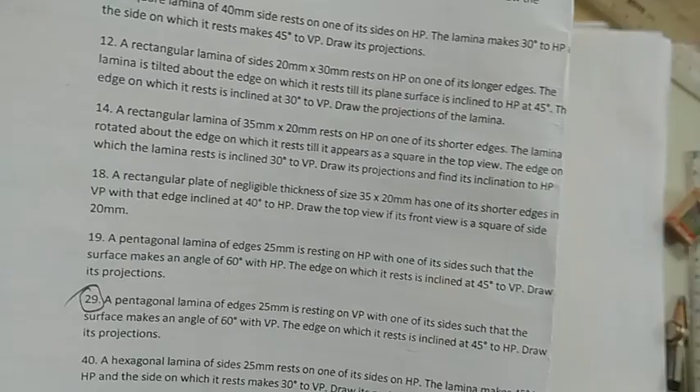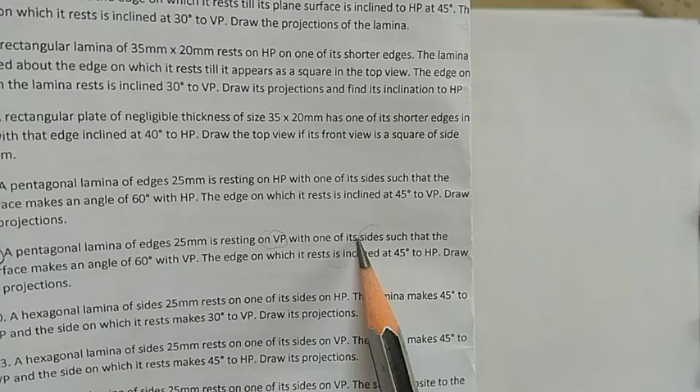So, friends, here we go with number 29. A pentagonal lamina of edges 25 mm is resting on VP. So, it rests on the VP on one of its sides, such that the surface makes an angle of 60 degrees with the VP and the edge on which it rests makes an angle of 45 degrees with the HP.

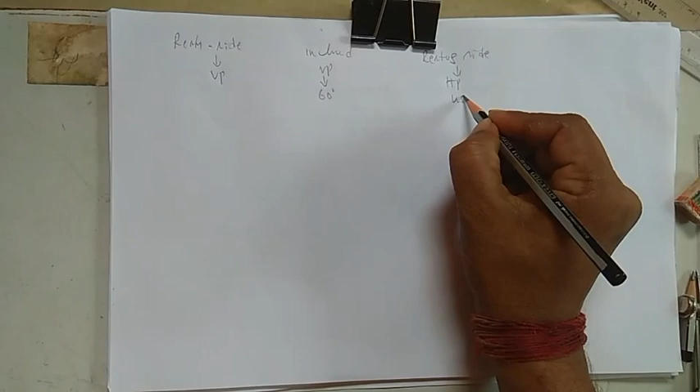Okay, so here what I have to note down is: it rests on a side on the VP, important. Next, it is inclined to the VP at 60 degrees. Next, the resting side is inclined to the HP at 45 degrees. So if it is resting on the VP, for the second position you look for the word inclined to the VP, and for the third position you look for the word connected with the HP.

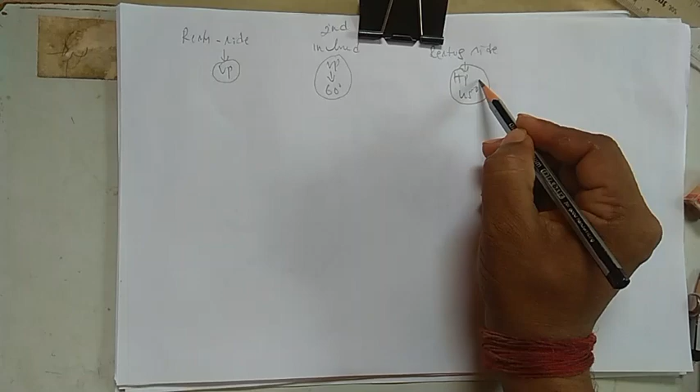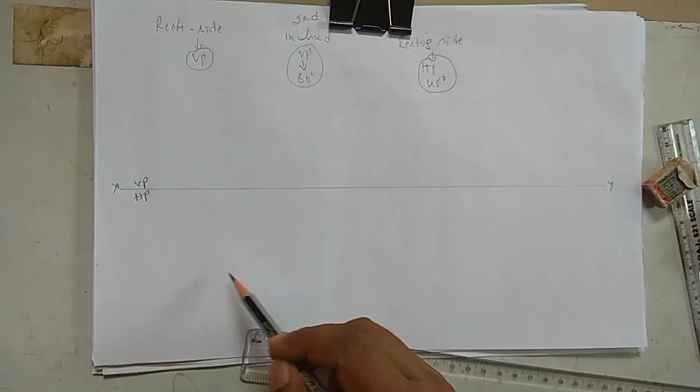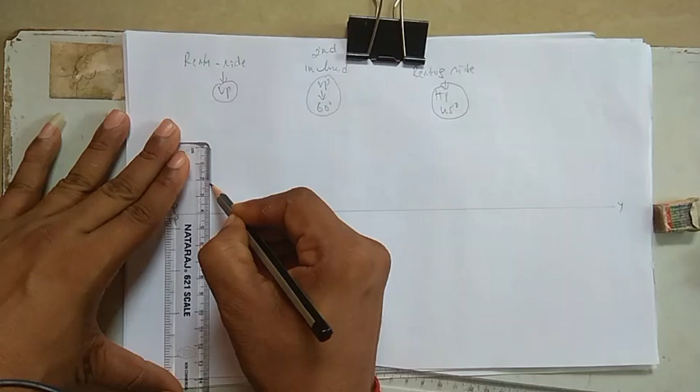Okay, so to start with, we'll take a reference line and write: this is the VP, this is the HP. Resting on VP means it should start above the XY line. If it is resting on the HP, you have to start below the XY line. Now the side is 25 mm, and it is resting on the side, so the side has to lie to your left. Okay, it's 25 mm.

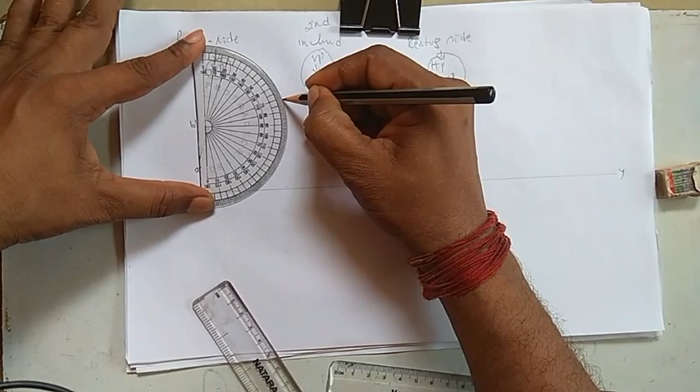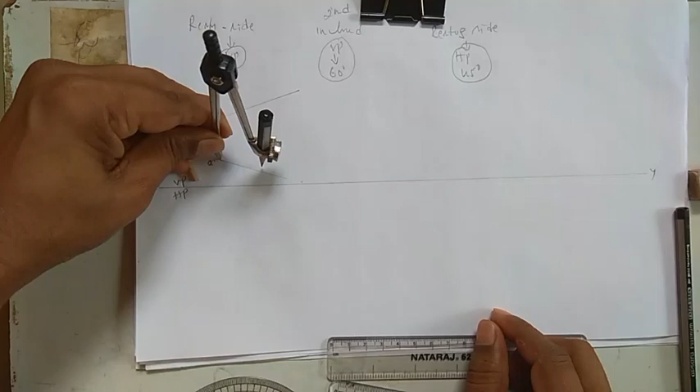Okay, so how to construct a pentagon? This is A dash and this is B dash. Keep a protractor at side A and mark 72 degrees, and keep it at side B and mark 72 degrees from there. Now take a scale and draw thin lines, and with the compass take the same 25 mm, cut it on this 72 degree line and on this 72 degree line, and again from here cut the same length with one more arc. Now join these lines with thick lines.

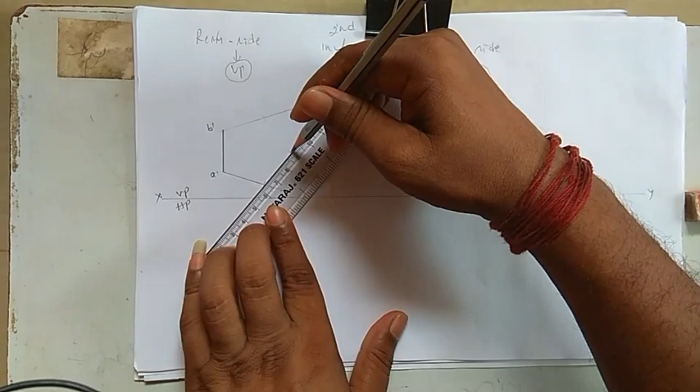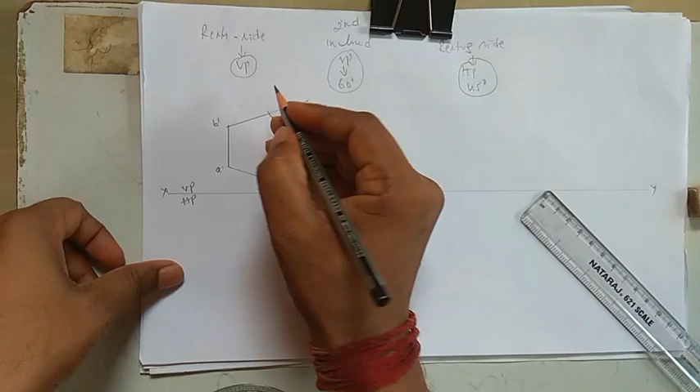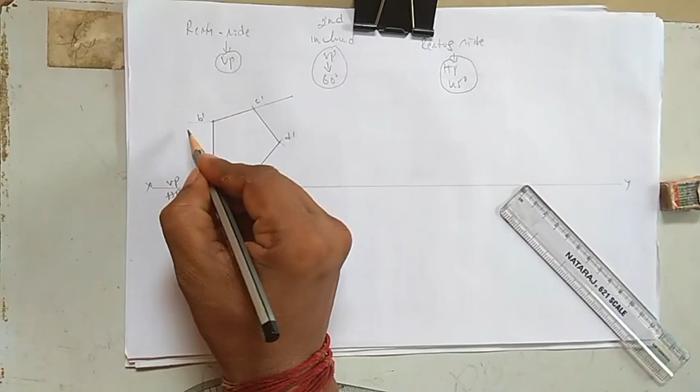Okay, so this is exactly how you can construct a pentagon. This is my C dash, D dash and E dash. So once again, we took a side length of 25 mm. You can draw a line here also. So this is 25, and we took 72 degrees from side A and from the opposite side B, and we took a 25 mm length and cut an arc.

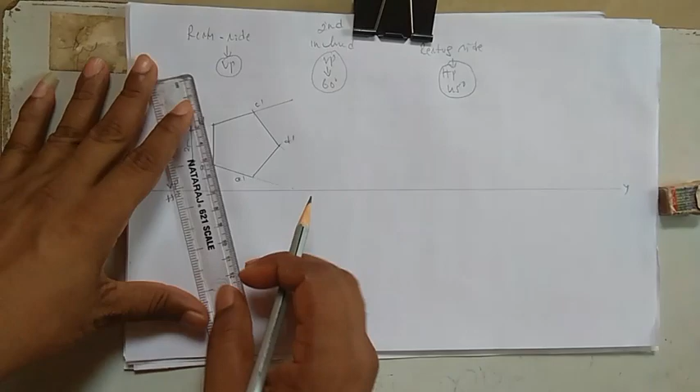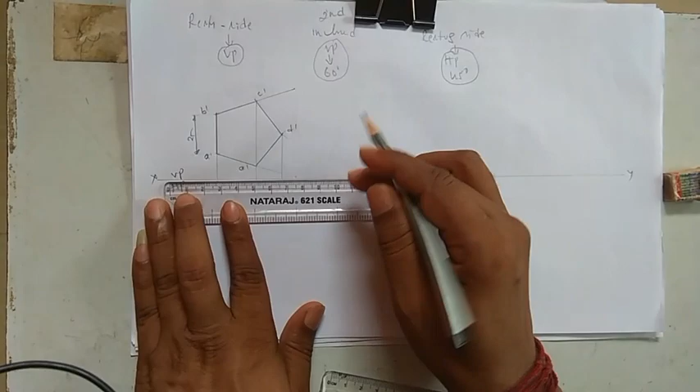So now take a projection downward. These two have to pass through the same line. Okay, so this much should be dark. We'll write: B is near, so B with A in brackets, C is near, so C with E in brackets, and this is D. Till here it should be.

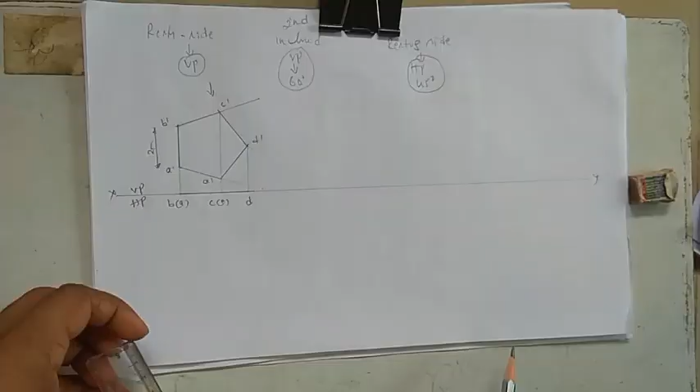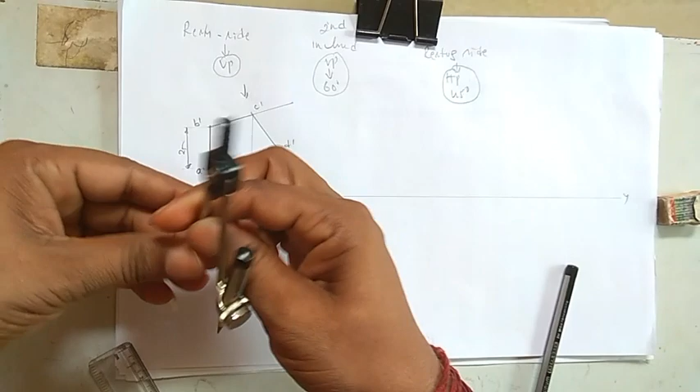Okay, so once we get this view, now it is inclined at 60 degrees to the VP. So take any one reference point. It's 60 degrees. Draw a thin line again on this one. Now take this length from A, B to D, and from this reference point cut an arc. So this is our B with A in brackets and this is our D.

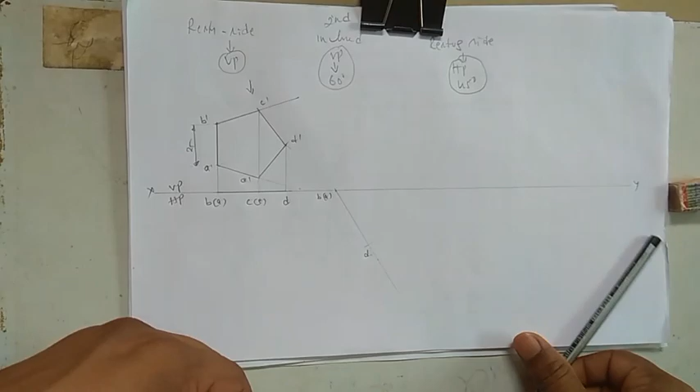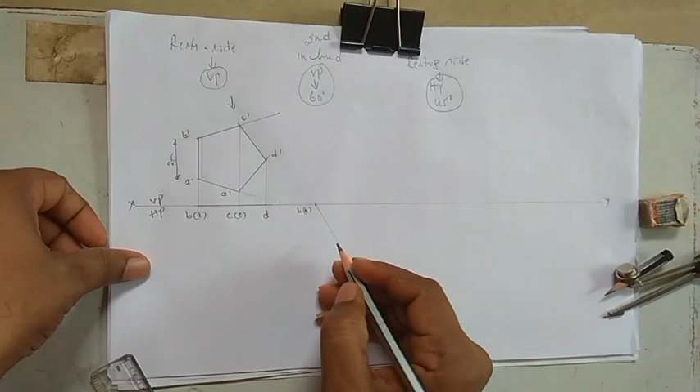Now from D take the length CD from this reference and cut it on this line. So this is our C with E in brackets. Okay, so make this much dark.

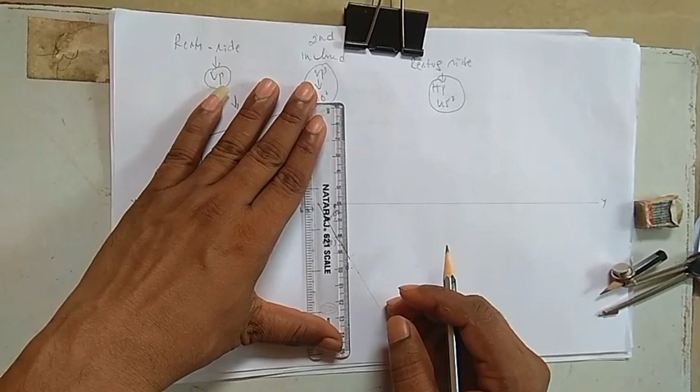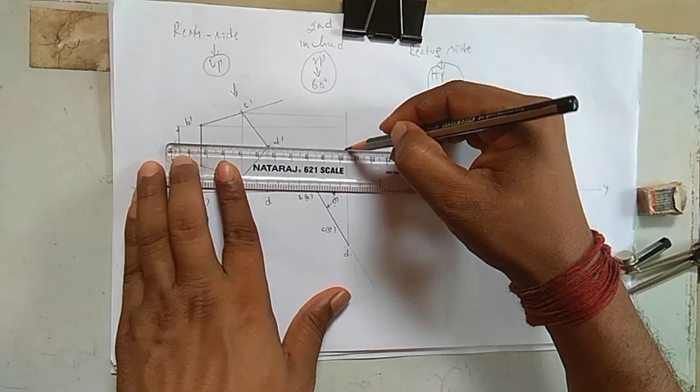Okay, so while writing, the angle should be close like this, and 60 should be written like this. This is 60 degree. Okay, so while projecting, what you can do is first drop the right extreme line. Okay, right extreme line, then here the topmost one. Okay, complete that one. So now either you can choose to draw the horizontal line till here, or you can draw the vertical line, whichever you feel, you just drop it.

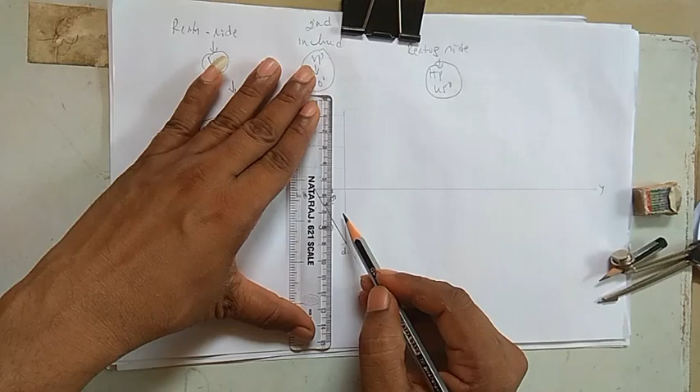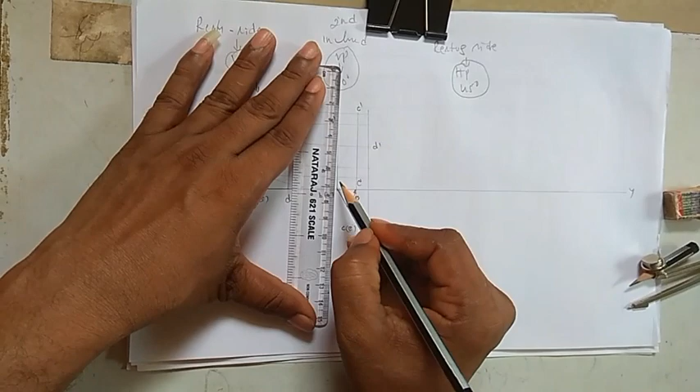Okay, so like this. Now while drawing this one, this is CE, you just see here E and here it's a C, so you just drop this line till the top, and you can say this is C dash and this is E dash. On this line this is D dash. Okay, now this is A and B, just drop till here, so this is B dash and this is A dash. Okay, now join this one with a dark line.

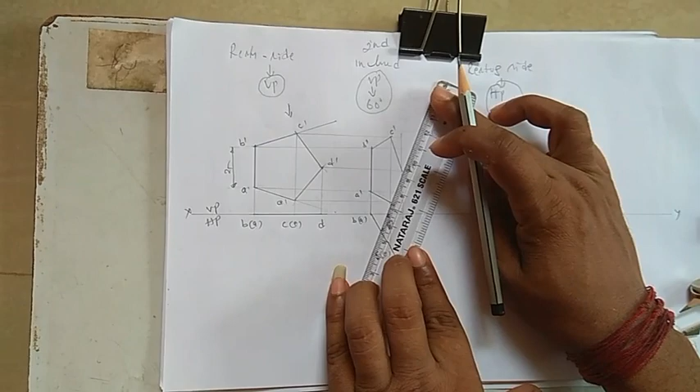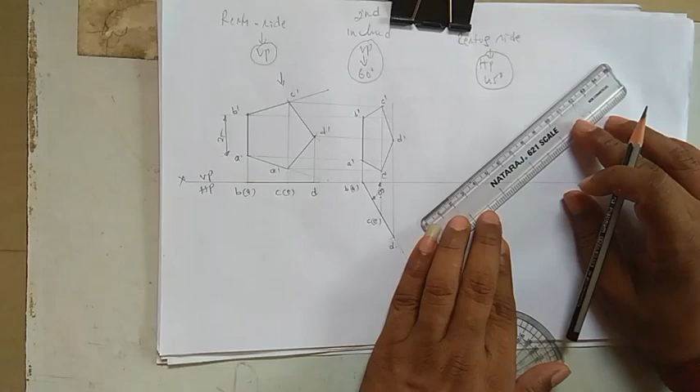Okay, so this is how exactly it is visible, only this much should be dark. Okay, so now it is the resting edge. This AB is inclined at 45 degree. So now take any reference point here. Okay, so 45 degree and just drop a line on that one. Okay, so this is 45 degree. Okay, so now you have to construct this pentagon on this one, keeping this AB or this line.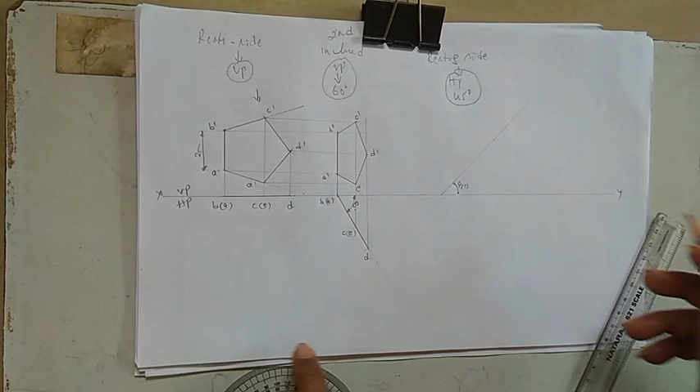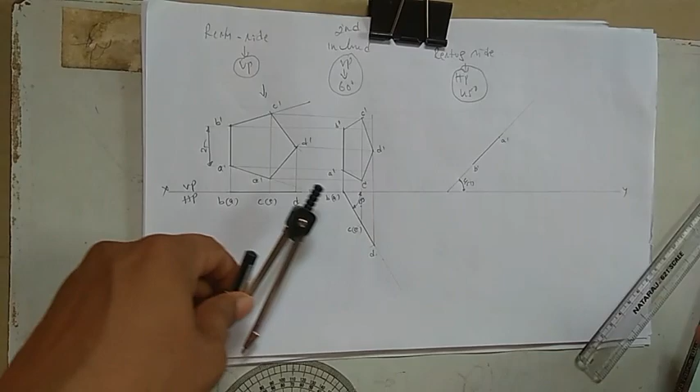Okay, so now anyhow AB is 25 mm, just take 25 mm directly from any one reference point, so here, so we'll take and we'll place it like this. So B dash will come here and A dash will come here, so this and this point. Okay, now you can go with the arc method, or the easiest one is: D lies at the midpoint of this one. Okay, so now you can say this is 25, half of this one is 12 and a half. Okay, 12 and a half, and drop one perpendicular line, just one perpendicular line.

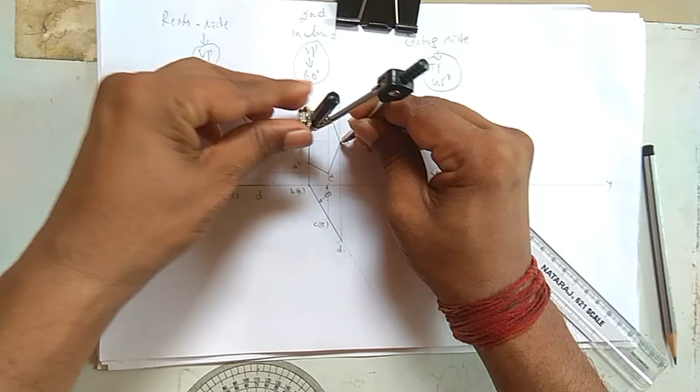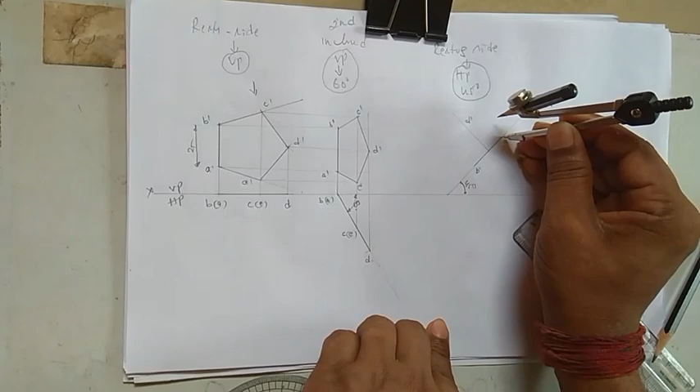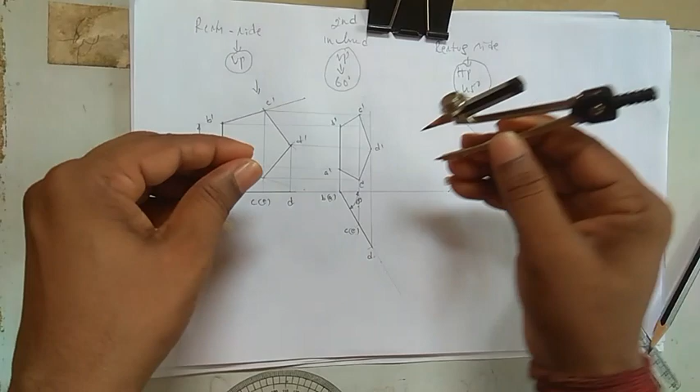Okay, so now take this length D and this length, from here cut an arc. So this is our D dash. Okay, now we have A, B, D. Take a reference from A and D. Okay, from A to C you just cut an arc, and from D to C. Okay, so from D cut the arc. Okay, you can check it out from D to C again. Okay, so from D to C. Okay, so from B to C, from B to C.

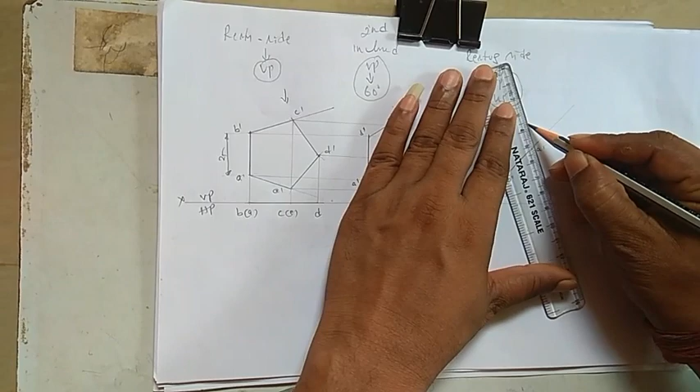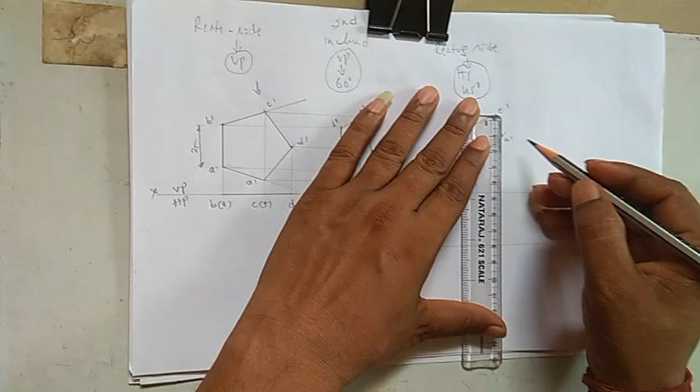Okay, so now join here, here, here, and here. So A, B, C and E dash. Okay, so now project this one down. First, what I said, you just take one bottommost line like this and one rightmost one. Okay, so project these horizontal lines because there are only three.

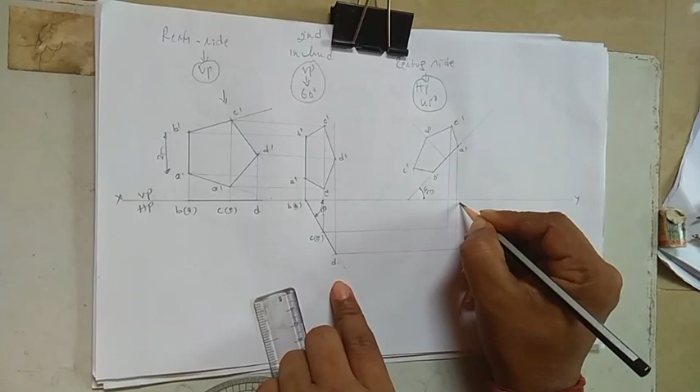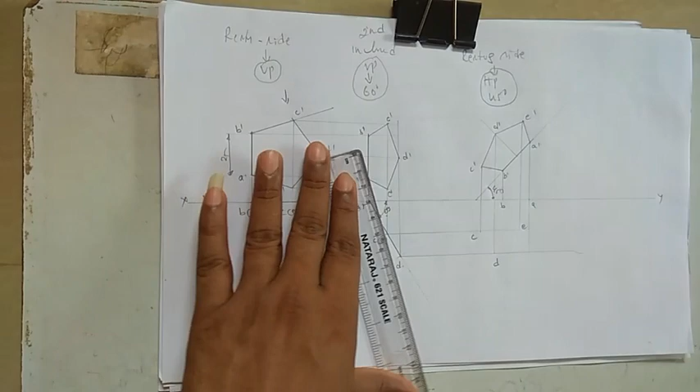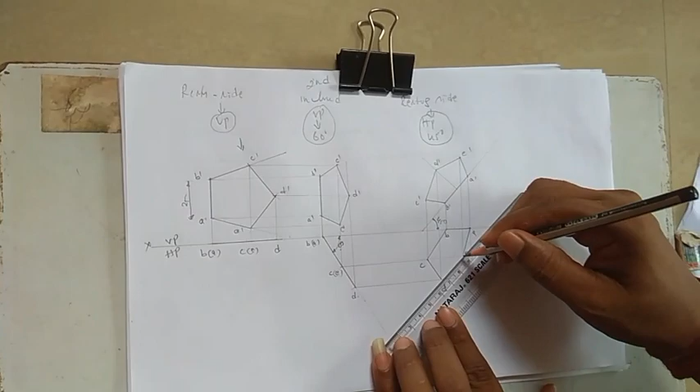Okay, now so E, okay, so this is our A. Okay, so this is our E. Okay, so now D is here, so take D till here, so this is our D, and take C, so C is here, and B is on the XY line, so B is on the XY line. So now connect. Okay, hold the line. So we will get things like this.

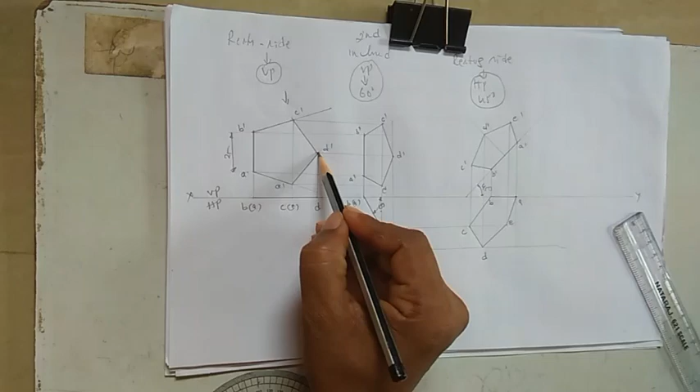Okay, so now, suppose if it is resting on the HP, the same thing will start from here. We'll start from here and we'll drop it upward, and the inclination we'll take here and we'll do it. Okay, and if it is resting on the corner, we'll take the corner this side, we'll take an edge here and we'll continue.